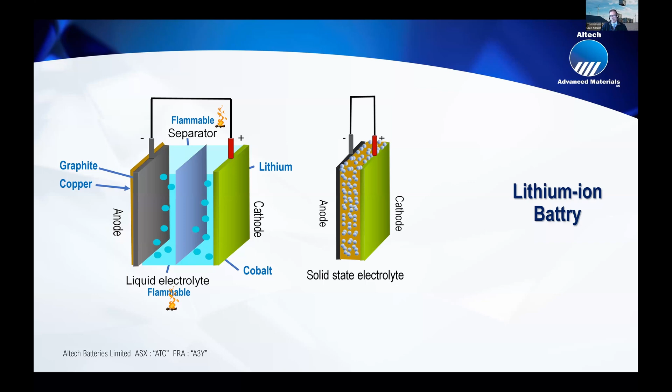This is exactly what we're doing. As I mentioned before, with lithium-ion batteries there is no 100% safe battery. There is production, there is aging, there are dendrites, there are many things that can burn, and there's great concern.

So if we summarize, the lithium-ion battery has a safety issue. We can have an explosion. We can have overheating, physical damage.

You can see it on the phone once it's 3 years or older. It gets hot when charging. And the fire is impossible to put out because the cathode produces oxygen. So in itself, it's a flammable composite.

So it's very difficult. What people don't know is lithium-ion batteries are sensitive to environmental temperature. It works well, like a child, between 15 to 35 degrees. So if it's very cool, you have to heat it, and you lose a lot.

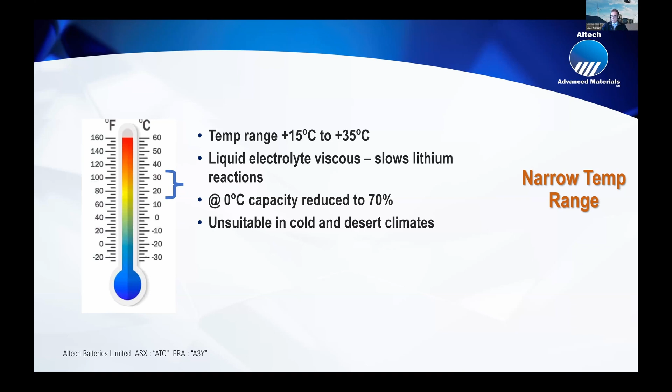But if you have, like in a solar plant in the Californian desert, you need to cool the battery a lot. And even up to 50% of the power is lost.

Then the lithium-ion battery degrades through life. So after 5, 6 years, it only has 70%. And because of the very intense charging of your handphone, you will see a reasonable degradation already after the second year. Well, there is competition too.

Lithium prices are high. At the moment, the price has come down because the battery market has a slight bump. But overall, lithium is a risk, especially for European industries.

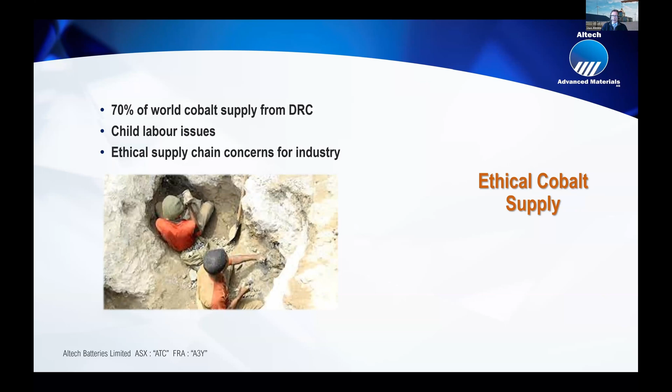More so, cobalt, as the active material of high-performance batteries, comes from the Congo, so there are many critical issues. But even more critical is that the graphite, which is important for the anode, comes from China, 90% of it.

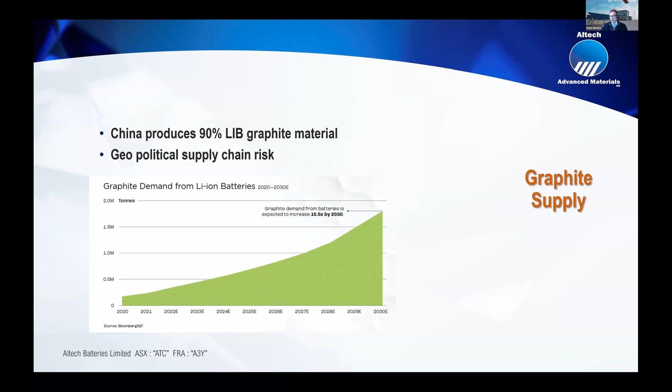Best example now is Northvolt. Northvolt is trying to produce batteries. They have changed the graphite and have a very large yield loss, with all the problems attached to it.

Also, copper. If you look at the various models, copper - I'm sure you all invested in copper because the price is going up - there's a crunch. We need not only all the copper for the batteries, but also the cabling and the grid, and copper is a crunch.

So my question to you: is there a battery that can be produced which doesn't burn, is fireproof, can take a large temperature range, lives longer than 15 years, and does not require lithium, cobalt, graphite, copper, or manganese? I'm introducing to you Cerenergy.

This is our product. It's a solid state sodium chloride battery. Sodium chloride is table salt. So there's simple table salt inside - very simple ingredients. It's a high temperature battery.

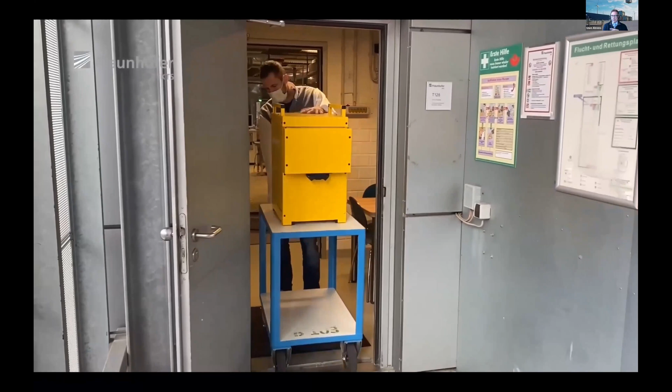This battery technology has been available since the 90s, and Fraunhofer in the last 5 years has adapted it, and we are now putting it into industrial production.

This battery has no liquid electrolyte, so it cannot burn. You can throw it into fire, you can put it anywhere. It's a significant advantage for public areas, data centers, and any other places where thermal runaway is a real risk. So it's absolutely fireproof - it works in any temperature and does not need cooling or heating.

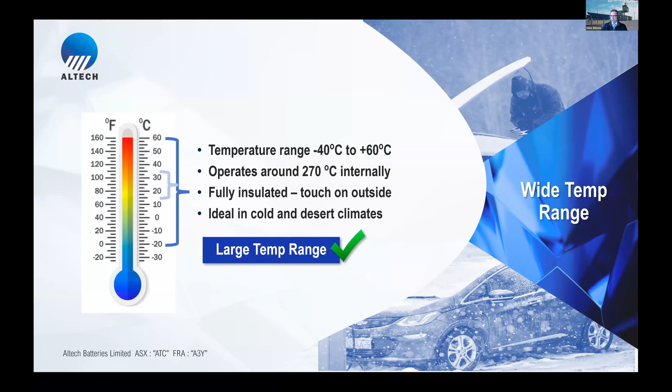You put this battery - as you can see behind me, this is a 1 megawatt container - you put it somewhere, it works, you leave it. You don't have to do anything. It has an ultra long lifespan, as I will shortly show you.

I don't have an anode. The anode builds itself every time, so I have no degradation. I use simple common salt. I can build the battery anywhere in the world with local materials.

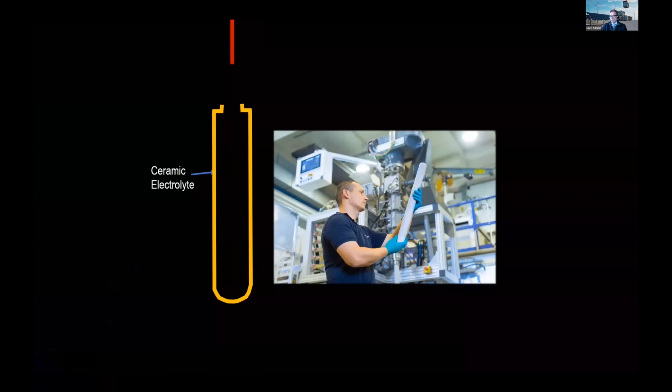I don't need to do anything. I don't need cobalt, I don't need graphite, which is a critical item as I just explained, and I don't need any copper. So this is a very innovative technology made in Germany and now being brought to production by us.

You can see here, the yellow one is this ceramic cylinder that the gentleman is holding in his hand. We put a nickel cathode electrode inside and then fill it up with active material, which is a mixture of table salt and other ingredients.

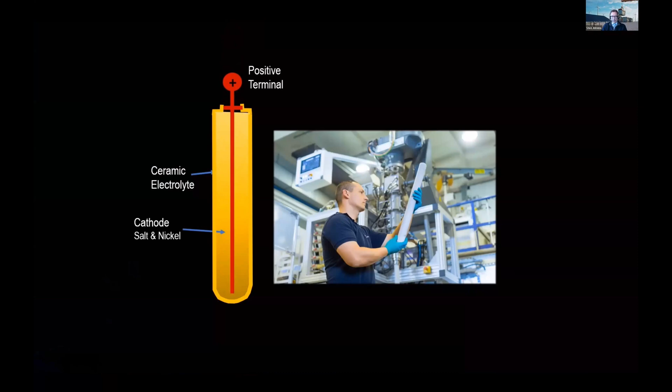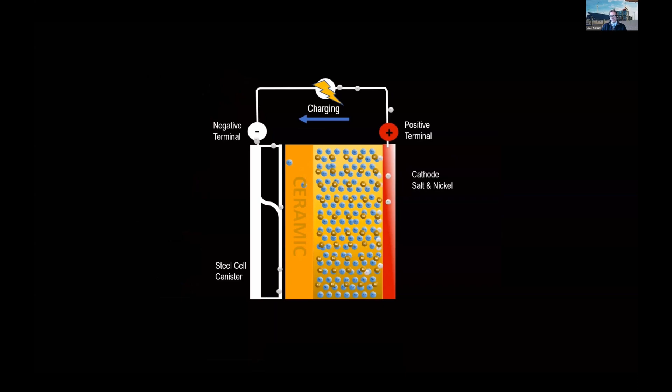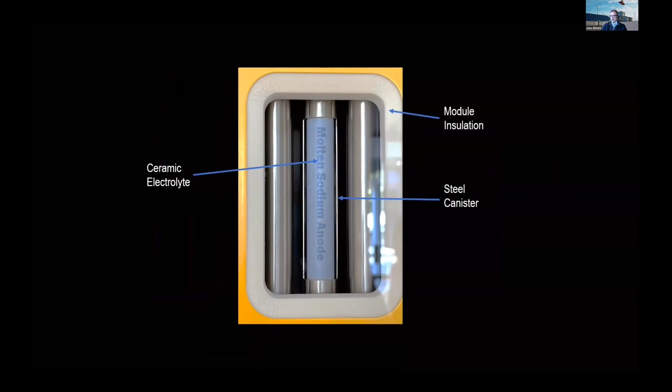These battery cells have been built for 6-7 years now. And since November last year, we are building the final prototype as it will be produced in the future in the proposed plant. It's a very straightforward process.

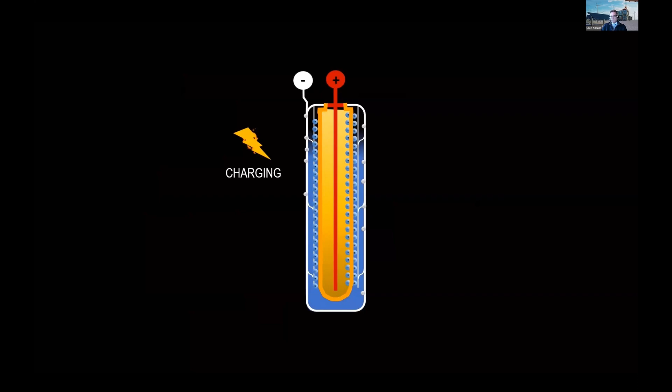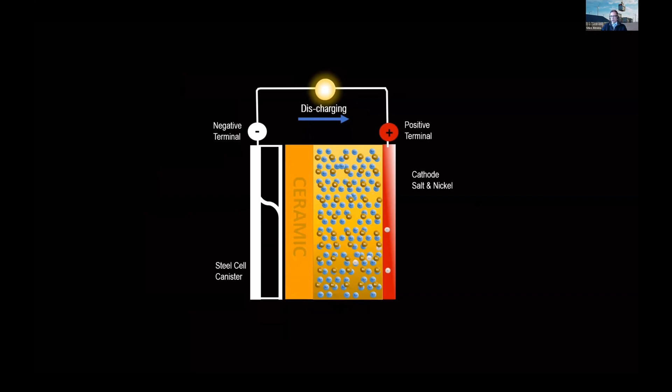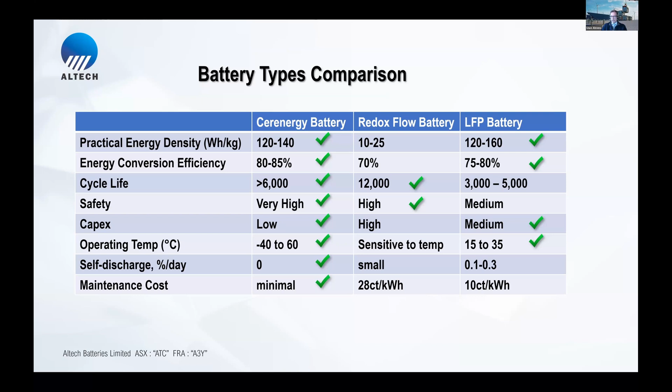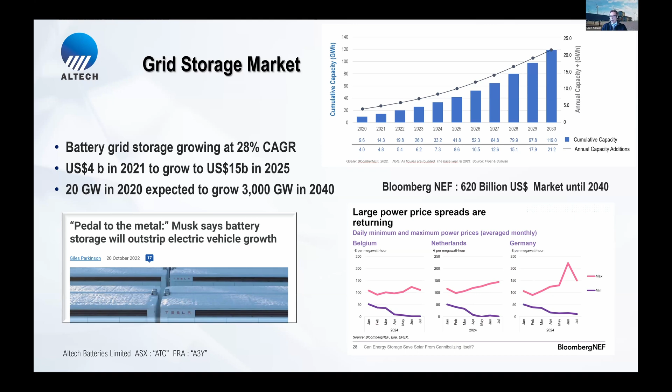Now, what is the business case? We all know energy transition cannot happen without this. Elon Musk said a couple years ago he's going to make more money with batteries, and true enough, in the last quarter Tesla made more money with grid storage than with the cars. Or look at Bloomberg, you can see the market is growing exponentially because this is the market they have to serve. And there is a money case - I was at the Bloomberg Summit last week, and everybody is looking at the margins to be made with batteries, and they're ever increasing. What is the application?

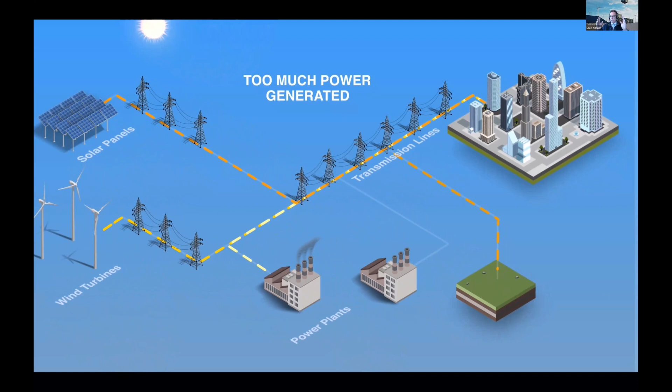The application is that there are two challenges in energy transition. One is solar and wind power is produced at one time, and the consumption has to be at another time. So you have to bridge this gap. This bridging happens with batteries. So during the time that the sun's shining and the wind's blowing, you charge it, and then you can put it later into the grid and do the arbitrage, the margin.

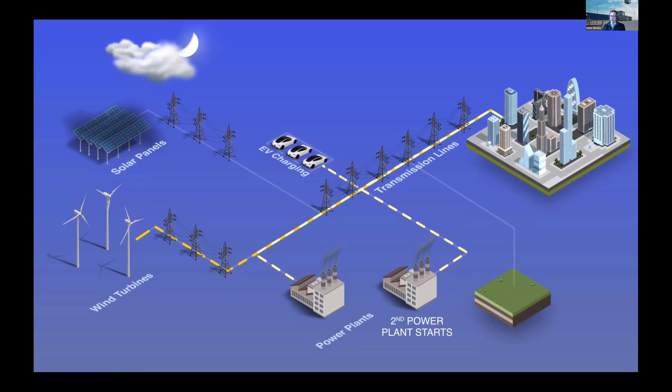But more so, in Germany, the north produces wind power, but it's required in Munich. Can you get it there? No. And why can't you get it there? Because the grid is already full. You have this graph, everybody can download it from the Bundesnetzagentur. You can see redispatch - redispatch means renewable energy produced but thrown away.

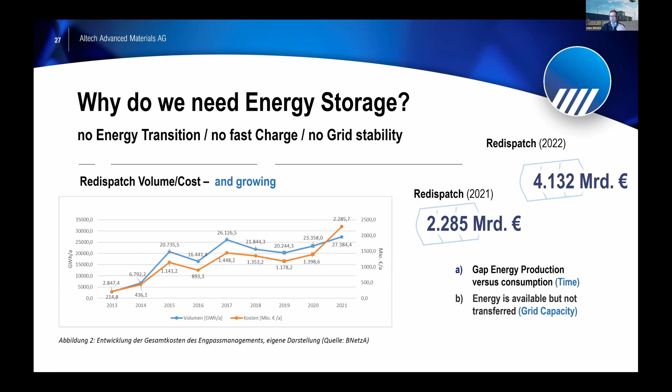In 2021, it was 2.2 billion. Last year, it was 4.1 billion. So the German government is throwing away 350 million euros every month for renewable energy that they have to pay for but cannot use. It's pretty bad, right? And it's going to grow.

For arbitrage, you can see on the left, this is the general Eurostock arbitrage of power. You can see it go from -3, -4 cents up to 70 cents. That's a huge margin. But in other parts of the world - I was in May, I was in New South Wales presenting at RIU - you can see this is the actual spot price at peak in the evening. The grid company has to buy 1 kilowatt hour for $15 Aussie. It's ridiculous. Of course it's not sustainable, but because power is tight, this is what people make.

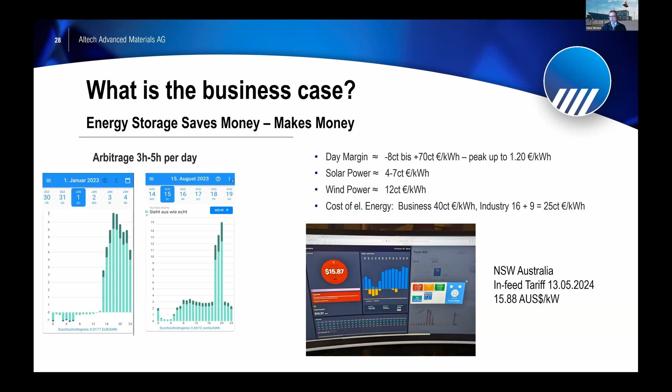So you and I, if we had a battery, we'd make huge money. So we are ready to commercialize.

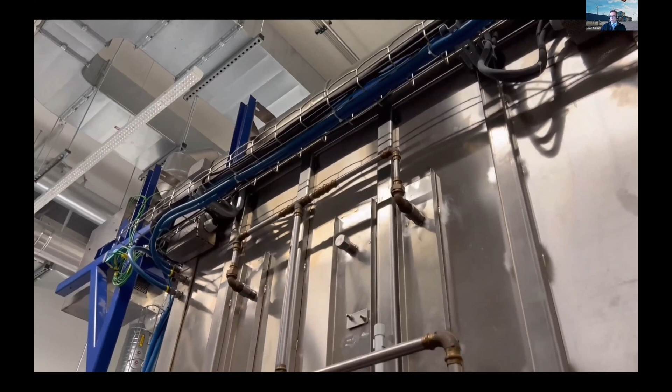This battery is being produced. We have a pilot plant in Hermsdorf. Everything is being produced. And as you can see from our announcement, we have made the industrial prototype, which is now cycling in Dresden. So everything is ready, everything is there - there is no storytelling. The battery is ready, and we are moving into our first industrial production line in Saxony.

We have purchased, as I presented before, 14 hectares of industrial land in Schwarze Pumpe, which is really the center. We have all the infrastructure, we have the electricity, the renewable energy - we have everything.

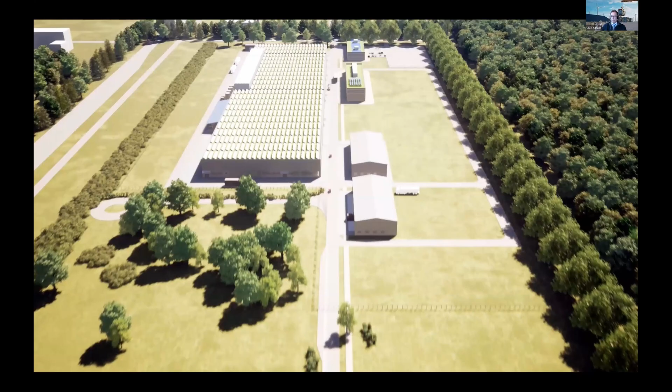And this is the real plant. The design is absolutely finished. We are now in the funding stage - I'll come to that right away. We have 42 subcontractors, the who's who of the industry. Whether it's Tesla in Brandenburg, or Northvolt, or Volkswagen or BMW, they all use the same contractors.

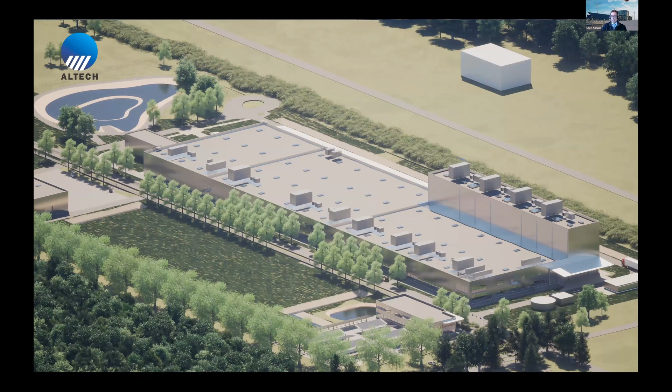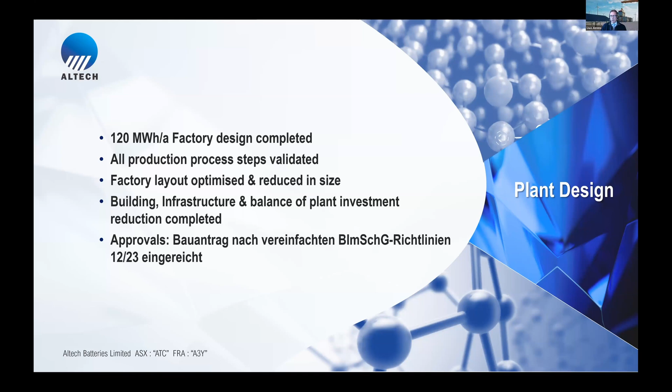And this is the plant - it's ready. The inside I can't show you, that's of course confidential. And this is the first one - we have made all approvals, we are ready to go. This is the plant layout, and this is the first product: a 60 kilowatt hour battery pack.

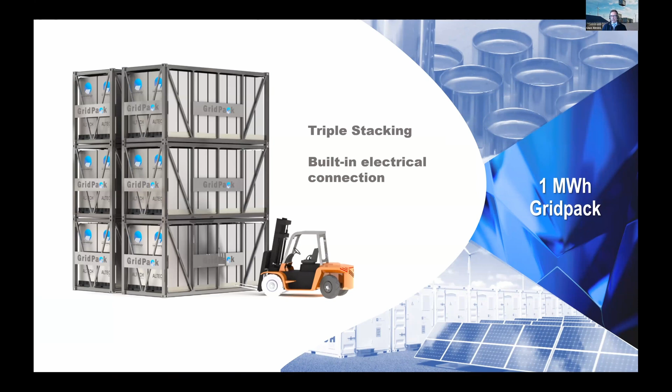So this battery pack has been produced and is running in Dresden, and we are collecting all the data. Of course, our first product that we're selling will be the grid pack. We don't have enough capacity. We only have 120 of these grid packs in the first line to sell per year, and we are now signing the offtake agreements, of which one we have already signed.

This is the big picture that is running in the back. We have all this incredible USP: no fire, no aging, no maintenance, and you can stack it like an industrial plant. Like hydrogen, you can't store hydrogen energy and have a lithium-ion battery - it's much too dangerous, but our battery can be there in a steel plant, in a shopping mall, in a hospital, everywhere.

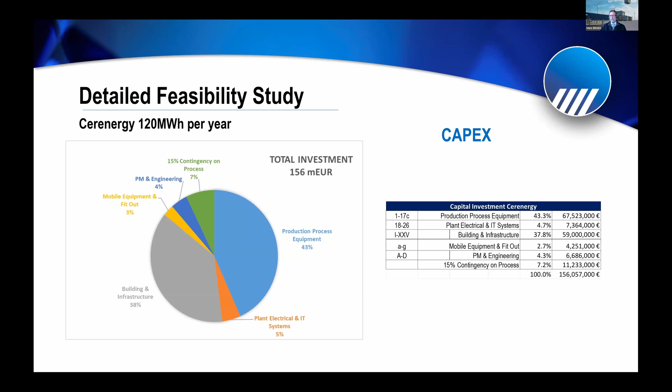So our feasibility study was issued end of March. We require about 156 million euro for the construction of the plant. Of course, battery manufacturing is scale sensitive, so we have a big plan to go on, but we have to prove to the market and to the investors and the capital markets first that this plant is really running. That's why we have a first small line, and this is what we're doing.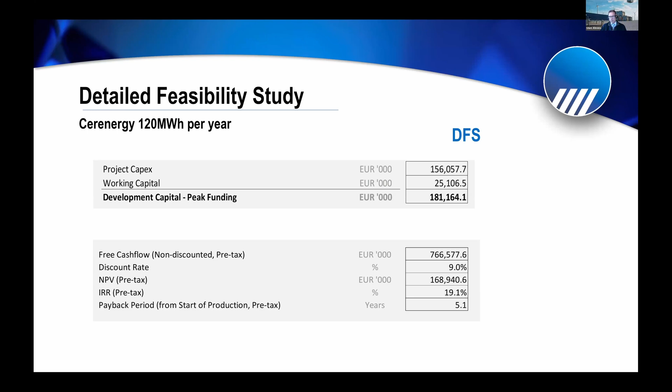We have incredibly good IRR, even for this small project. We have an NPV of 168 million euro and an IRR of 20%. Of course, some people would like to have more, but this is the first line, and our cost regression is phenomenal - the cost will be half on the first gigafactory and then half on the next gigafactory. So we're really getting there. But the EBITDA margin is 47%, and our costs are decreasing through time. So it's a very profitable project.

And we have now appointed KPMG to do the funding. The funding is about 220 million. As I mentioned, 156 million is the bare construction. We need working capital, and then of course the cost of finance during construction, totaling anything between 200 to 220 million.

We have available equity in the range of 60 million of pre-commitments. We are applying for grants, which are still sort of up in the air, but we applied, so we will wait until end of the year. We have an application for an EIB venture capital loan and other commercial credit.

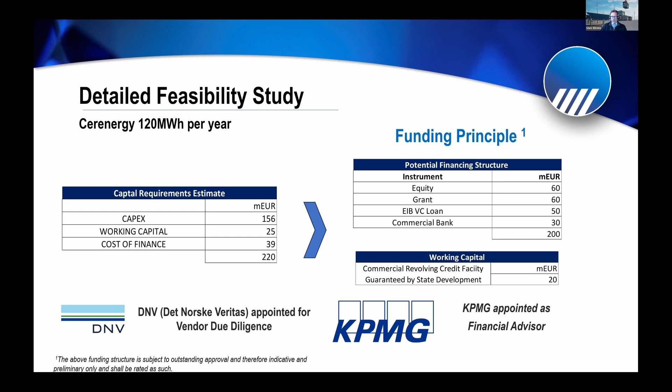For the verification of our technical due diligence, we have appointed DNV. For people who are familiar with the industry, this is the number one certifying company in terms of battery - Freyr, Northvolt, all use this company. This is our plant.

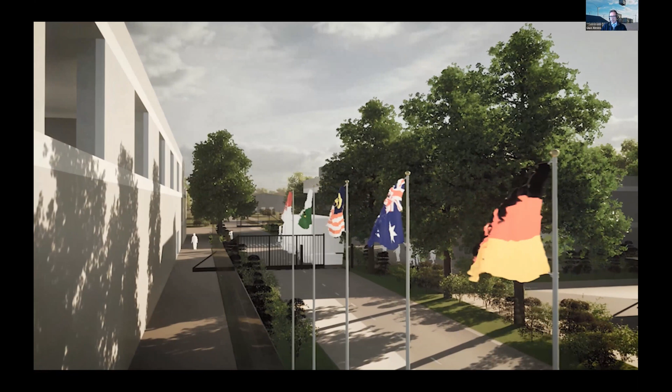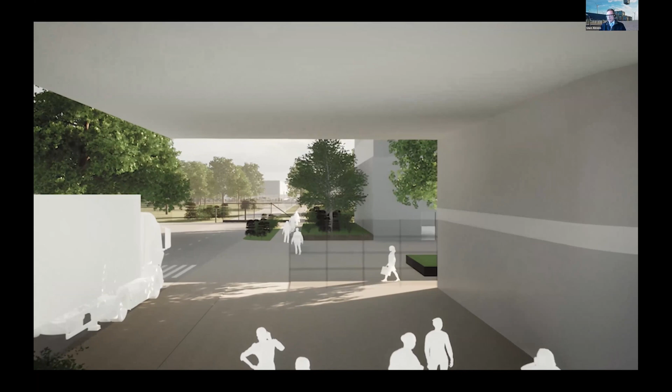Why is it so detailed? It's because we want to have everything ready. We don't want to take any risks. We really have every machine, every component ready. Every machine that we are using has been pre-tested, so I'm very confident that our startup will be not as difficult as sometimes it is. Two reasons: because our solid-state battery is not as sensitive in production as a lithium-ion battery, and we are using all equipment and materials that are available in the market and are not prototypes in any way.

So this is our main plant, and I hope it was not too fast. And I really like to open the floor for questions, and like to hear your opinion. And I'd like you to join us in this race.

Maybe one last thing I would like to mention is that we have bought 14 hectares, but we made an application for 60 hectares, and that 60 hectares is for a 4 gigawatt factory, which we are now in the progress of planning. This is the story of the grid battery, and that is gonna make a big impact in Europe first.